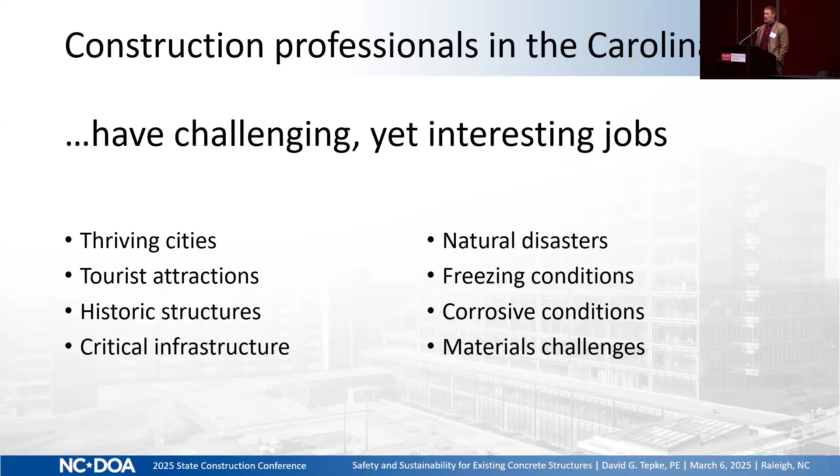And we also have material challenges. We have reactive aggregates that are used in making concrete right here in North Carolina, and there are certain things that need to be done to mitigate those certain types of distresses when those reactive aggregates are being used. So I guess as a person that looks at existing structures in the Carolinas, it's a very interesting job indeed.

So why are we interested in safety and sustainability of existing structures? Why is this coming up more now, seemingly more now than potentially ever? Well, when you look at the industry motivation for pretty much anything, usually change in the industry or need for new technologies is partially influenced by recent events, societal needs, and identified gaps. So while we can certainly ascribe the need to look into safety and sustainability of existing concrete structures because of these, this could pretty much be said for anything.

Obviously, we have initiatives and societal needs for extending our resources. Certain events that have led to additional safety regulations, etc. And also identified gaps in terms of the technologies we use.

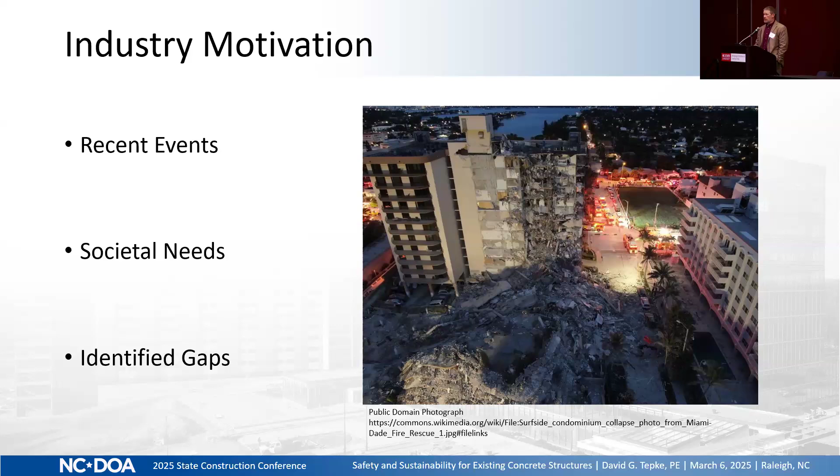So if you actually look at this, just kind of throwing some of the things together that are impacted by or impact those three primary drivers for change with respect to existing structures, certainly the environmental impact of the construction materials we use to make structures and how long they last, and also paradigm shifts. We'll talk as part of this presentation about how paradigm shifts are healthy and useful for the industry, but also we have to watch out for them because they can lead to maybe deceiving our experience.

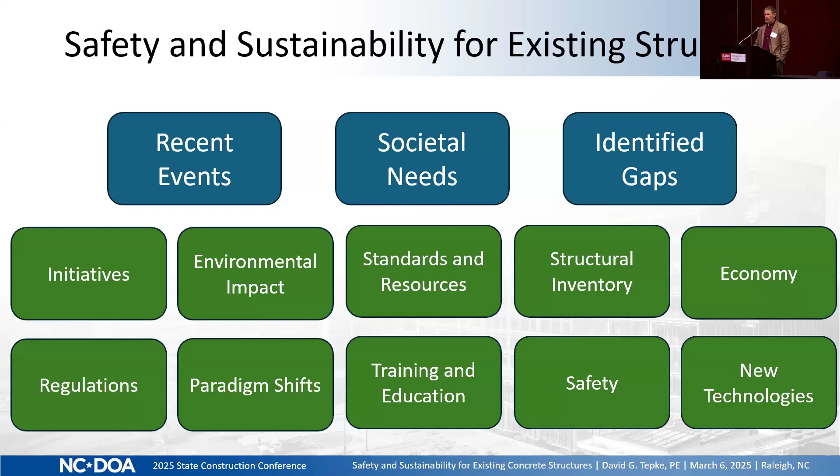And this leads into initiatives and regulations, and we'll talk a little bit about those with respect to safety and sustainability, new standards and resources, new trainings, and the impacts of economy and how new technologies can help us.

So what does structural safety mean? Anybody in the audience want to just yell out when you hear structural safety, what do you think? What is your impression when somebody says, 'Is this building safe?' What are they asking?

I heard, is it not going to fall down? Right, that's a very common definition, really. And we're going to talk here as we lead up how the code addresses safety, and also what an owner expects and maybe what an engineer thinks about when they're talking about safety. Well, that's a good definition. So what does the code say about safety and how does it qualify it?

The International Building Code, and by extension state codes that adopt it, in section 101.3 of the 2021 and 2024 International Building Code, says the purpose of this code is to establish the minimum requirements to provide a reasonable level of safety through structural strength and protection from hazards of dangerous conditions. So the code brings in this concept of reasonable safety.

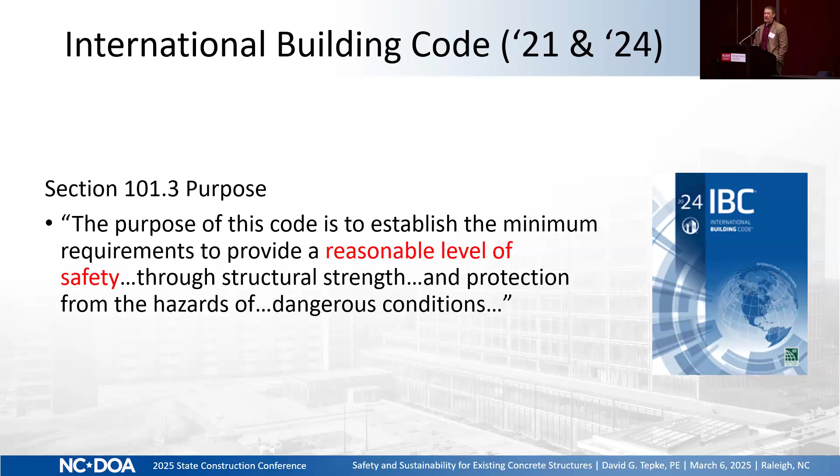And what is reasonable safety? Reasonable safety acknowledges the fact that absolute safety is something we frankly can't achieve, and we'll talk about why that is.

So in section 202 definitions, dangerous conditions are those described as has collapsed, has partially collapsed, has moved off of its foundation, or lacks the necessary support of the ground. That's a pretty good definition in terms of dangerous, or significant risk of collapse, detachment, or dislodgement of any portion, member, appurtenance, or ornamentation under permanent, routine, or frequent loads for the actual loads in effect and environmental loads when imminent.

And so this is the term significant risk of collapse. And how do we know what a significant risk is? And who determines what a significant risk is? And how do we quantify that?

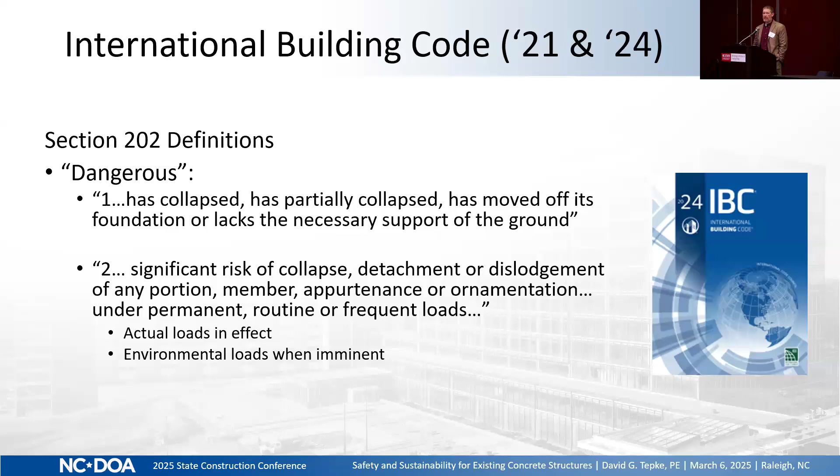The International Existing Building Code goes on to indicate that unsafe is essentially buildings or structures that meet the definition of dangerous or that are otherwise dangerous to human life or to the public welfare, et cetera. And so dangerous conditions are those that are unsafe.

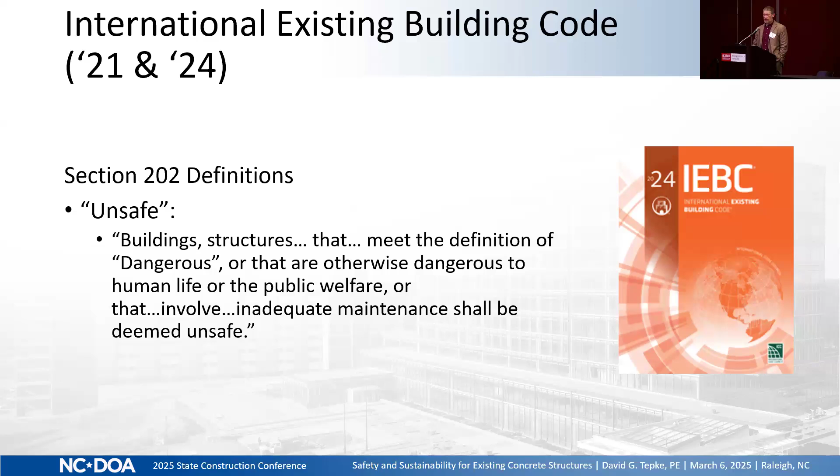The American Concrete Institute first published what's termed the Concrete Repair Code. It has a longer title than that, but it's called the Concrete Repair Code, and it was first published in 2013. It's been updated several times since, and it's been adopted into the North Carolina Existing Building Code as a permissible approach, meaning that you're allowed to use ACI 562 in the assessment and repair, structural repair of existing concrete structures.

But this document introduces a term called potentially dangerous, which is basically another qualifier that allows us to further determine what is potentially dangerous, or what leads to a condition that effectively does not meet the definition of reasonable safety.

It has been determined to have a demand to capacity ratio exceeding the limit of 1.5. That means that the demand or the load compared to the capacity is 1.5. So what that effectively means is that the factors of safety, if you're looking at the typical factors of safety on loads, are being removed. And at this point, this code indicates that that is a potentially dangerous structural condition.

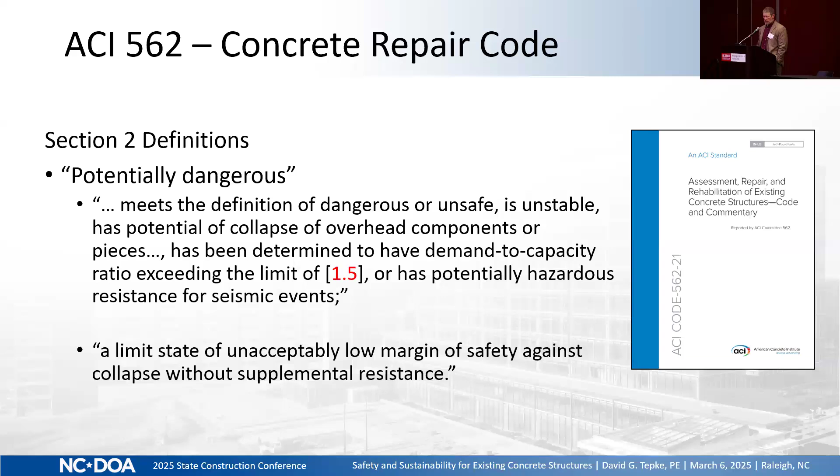There's some other definitions as well. So when we look at potentially dangerous structural conditions, this is a condition where we have structural deficiencies from corrosion, which mandated or required shoring to support elements that do not have enough capacity on their own to resist the loads.

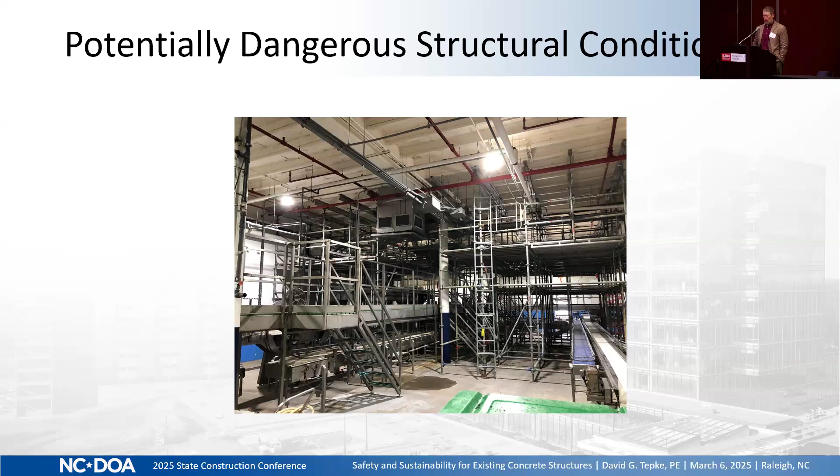Also, meeting the definition as written could be dangerous, potentially dangerous structural conditions from overhead spalling hazards. This is an example of what we see. Does anybody do work on the coast or in parking structures? The more likely scenario when it comes to corrosive environments is that of corrosion creating spalling in overhead areas that could potentially detach and fall large distances and hit somebody.

And when you actually look at the energy that can be generated by a 50-pound chunk of concrete falling 50 feet, or even a 10-pound chunk of concrete falling 50 feet, it's equivalent to the muzzle energy of some high-powered guns. So these falling hazards, these overhead spalling hazards, present a considerable condition of potentially dangerous.

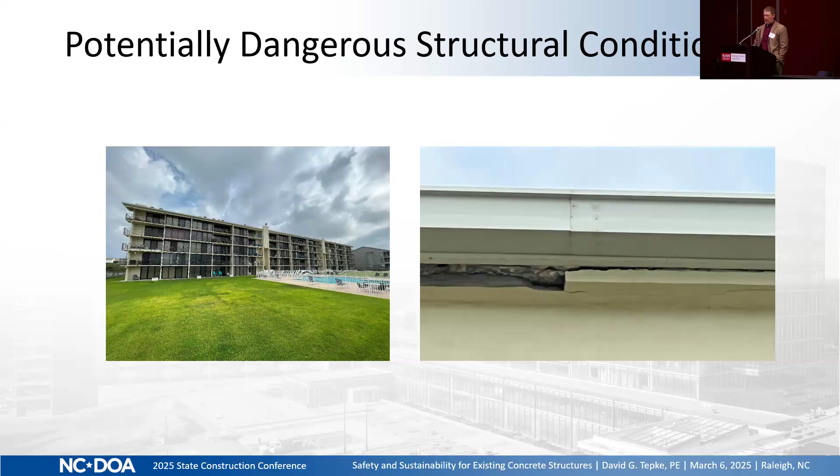But the concept of reasonable safety, and the first answer that came out, and we're going to loop back around to this, but when an owner says, 'Is my building safe?' What somebody who hasn't studied this or isn't sitting in rooms like this is really thinking they're asking is: is my building going to fall down, right?

What an engineer hears and what an engineer is trying to communicate back in terms of what they know about the safety, or what they can and can't know about the safety, and potentially what the likelihood or probability of a failure is, is something completely different.

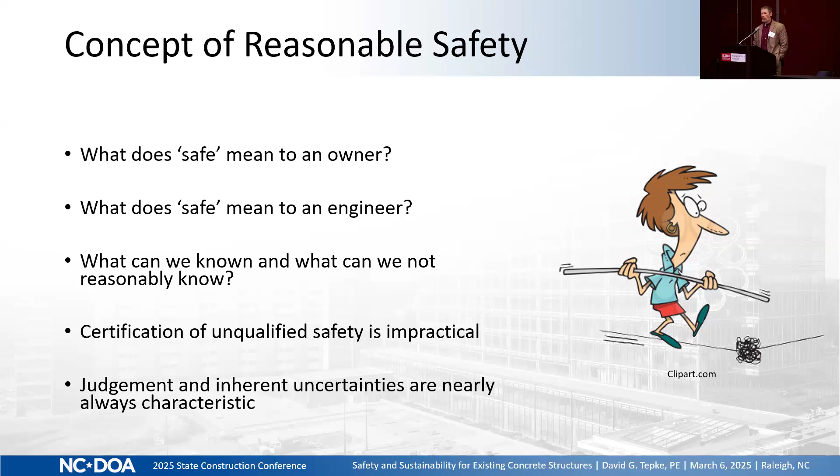It's the term and the idea of this reasonable safety, meaning that there is no absolute safety in anything we're doing, in any building that we're in, and we'll talk about why that is coming up. But certification of unqualified safety is impractical. And judgment and inherent uncertainties are nearly always characteristic in existing structures for a variety of reasons, and we'll talk about these in just a little bit.

But if you're familiar at all with how new structures are designed, basically what we're doing is trying to create a situation where the capacity of a structure has a very low probability of being overcome or being less than the amount of load.

When you look at this in terms of design practice, what you're actually trying to do, we have variability to all things, right? We have variability to the loads that we put on structures, and variability with respect to the resistance or capacity of structures, because we don't know precisely what the strength is, or precisely where everything is in the concrete. So what you're trying to do is separate the load from the resistance in a manner that the load is nearly always less than the resistance. Where these curves do overlap is the probability of failure.

From a safety perspective, people oftentimes say, well, we design to make things stand up. The way I look at it as an engineer is, we really design things to fail. When I say that, I don't mean you design them to fall down, but you design them with the understanding and intention of what happens when there is a problem. You want to consider the redundancies or what we call ductile failures, so that if there is an overload, there are situations that can be dealt with before there is some catastrophic problem.

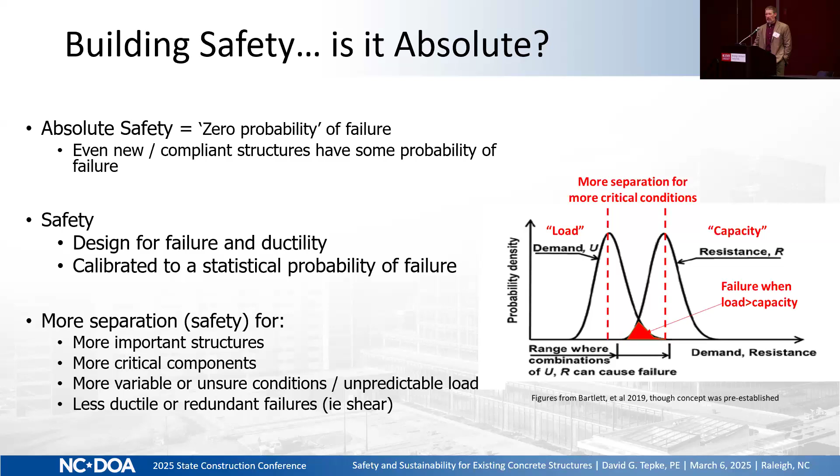More separation in these curves will occur for more important structures, for more critical components, or ones with less ductility or less redundancy. You need to extend this separation such that the probability of failure or exceedance is very low. So how does this work in codes?

Live load, for example, in a typical residential structure is 40 pounds per square foot. If you're designing in many residential structures, you assume that there's 40 pounds on every square foot as the live load, or at least as loaded for maximum load effects. But we don't actually expect 40 pounds per square foot to be on there all the time.

If you look at ASCE 7 in the appendix, you'll see that there's usually 6 PSF, maybe 12 PSF expected. However, if you look at a building over a 50-year lifespan, at some point somebody's going to get a hot tub where they shouldn't, or move and drag the washing machine, the dryer, the pool table, everything into the middle of the floor. Or maybe there's a party that creates a design event condition. So this idea is that these loads are developed for the probability of them occurring long term.

Similarly, for wind loads, we have Florida here as an example, but for different risk categories you anticipate different wind loads. For risk category 2, which is a normal building, you're looking for a 1 in 700 annual probability of exceedance. For risk category 4, such as a hospital or something needed for critical operation, you're looking at a 1 in 3,000 annual probability of exceedance. So this is how the code handles the idea of probability of exceedance.

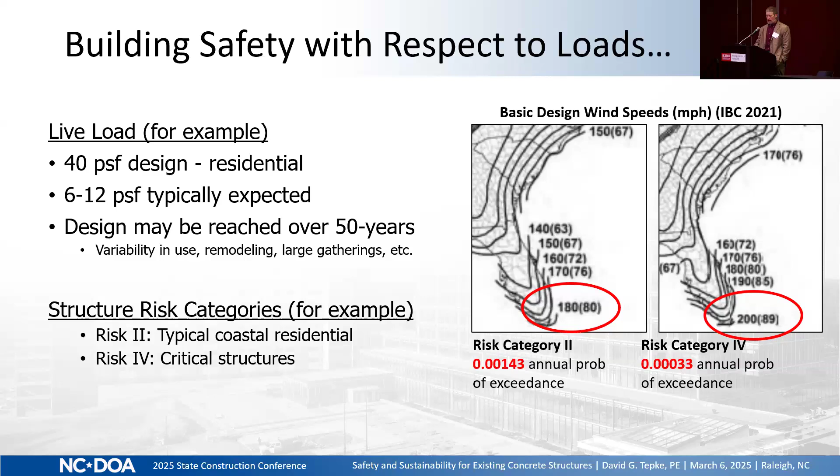So what is sustainability? We talked about safety. What does sustainability mean to you? Anybody want to yell out what's the first thing you think of when you hear sustainability?

Lasting, right? Something lasts long. What else? That's a good one. Anything else come to mind? Environmental responsibility, that sort of thing, right? These are all things that impact sustainability.

Let's take a brief look at what sustainability means. If you look at the Brundtland Commission definition, humanity has the ability to make development sustainable, to ensure that it meets the needs of the present without compromising the ability of future generations to meet their own needs. The EPA Report of the Environment Glossary says it's the continued protection of human health and the environment while enhancing economic prosperity and social well-being. Sometimes these concepts are referred to as a triple bottom line, with economy, society, and environment being the three major players defining sustainability.

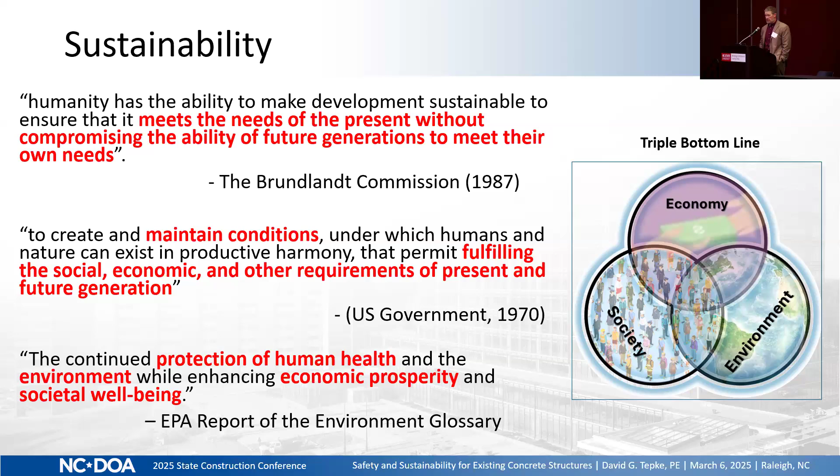For existing concrete structures, I put together this additional triple bottom line. When thinking about sustainability for existing structures, you have structural performance and safety on one hand, environmental responsibility, and structural and repair durability, or making things last longer. These three things significantly impact the sustainability of existing concrete structures.

Safety is part of sustainability for structures. Safety is the number one critical societal need for people today, leading into the future. So we've got to be thinking about cost, function, environment, durability, and service life extension, but safety is a key component. We might as well have renamed this presentation the sustainability of existing concrete structures, because it's redundant to say safety and sustainability in that respect, since safety is included.

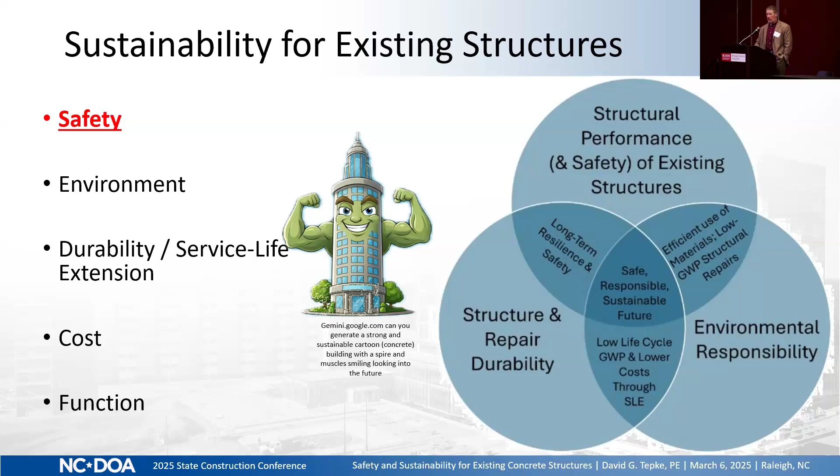So how is safety being handled in different areas? Really, all of this applies in terms of sustainability as well.

Jurisdictional regulations and ordinances—there are a number of them currently, and they keep popping up and continuing to be generated. Some examples are coastal condominium ordinances, such as the ones in Florida. There are parking garage ordinances, such as the ones in the Northeast. And there are facade ordinances in large cities where they require inspections on facades so they can get a reasonable level of assurance that large chunks of facade aren't going to fall off and hurt passersby. So these ordinances are cropping up.

The challenges with them are getting suitable language with respect to expectations and safety. I've read or seen a regulation that required a component or structure to be certified as safe, secure, and free of defects. I've never seen a building free of defects—I'm sure one has not been built.

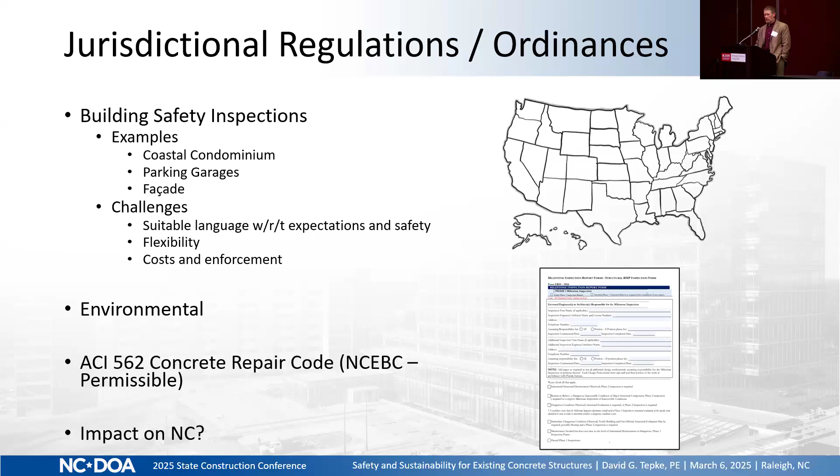So how do they often start? These condition assessments of existing structures start with a visual condition assessment, sometimes termed a phase one assessment—looking at the structure and the types of defects that could present themselves, possibly supplemented by some rudimentary non-destructive testing, but usually nothing major. Then, if something concerning is found, it could lead into a comprehensive condition assessment if required.

So there's a variety of resources for this—American Concrete Institute, and ASCE 11 was just updated for the first time in several years, which is a condition assessment guide. There are also documents such as ASTM E2270 for facade inspection. So there are a lot of guides and resources being developed.

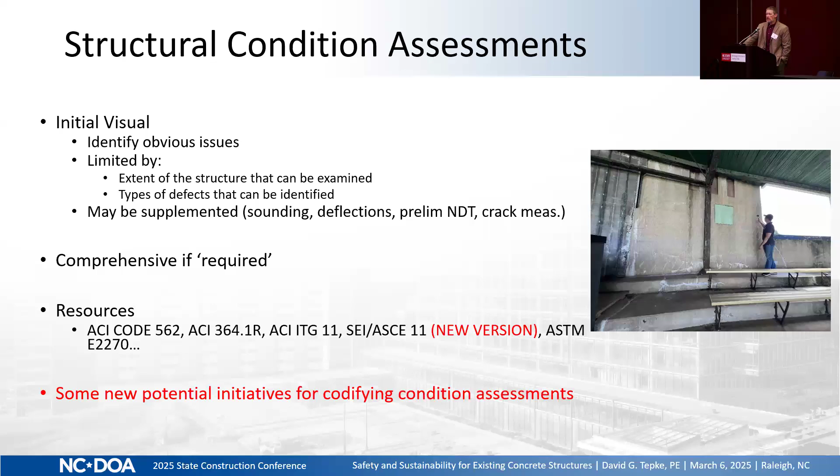As I understand it, there's some push to codify condition assessments. Now, if you're going to codify condition assessments, you need to allow for the flexibility that existing structures, with all their different types, require. I understand there may be initiatives in ICC and ASCE for codifying condition assessments, so these may become prevalent in the future.

Other challenges with existing structures involve a variety of maintenance practices, which may or may not be apparent when looking at a structure. Previous repairs, like these shown here, are not good repairs. This is how you don't repair concrete. If you look at the top left, it kind of looks like a New York City skyline in the repair geometry, which creates reentrant corners and all kinds of problems with cracking.

The one good thing is you can tell where the stirrups are in that beam, because I'm pretty sure those repairs kind of mimic where the stirrups are. In the upper right-hand corner, similar thing - it looks like some stirrups were repaired, maybe by a fraternity that was doing some work. It's hard to tell.

So anyway, we have historical maintenance practices that may be suspect. There could be changes in use, such as on the lower right-hand corner - that was a textile facility with hydrochloric acid exposure that sort of decimated the bottom of that column. That facility was converted, my understanding, into a parking structure. And so that certainly is a different exposure.

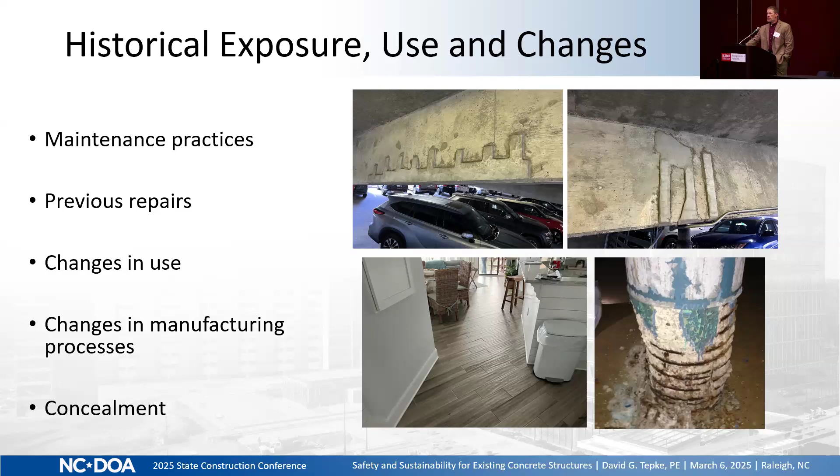And in concealment, when you're doing a condition assessment, there's often flooring, mechanical chases, all sorts of things that inhibit the ability to look at the structure. So these visual surveys may identify unsafe conditions, but they may not be viable for confirming quote-unquote 'reasonable safety.' There could be a lot of things that are unapparent.

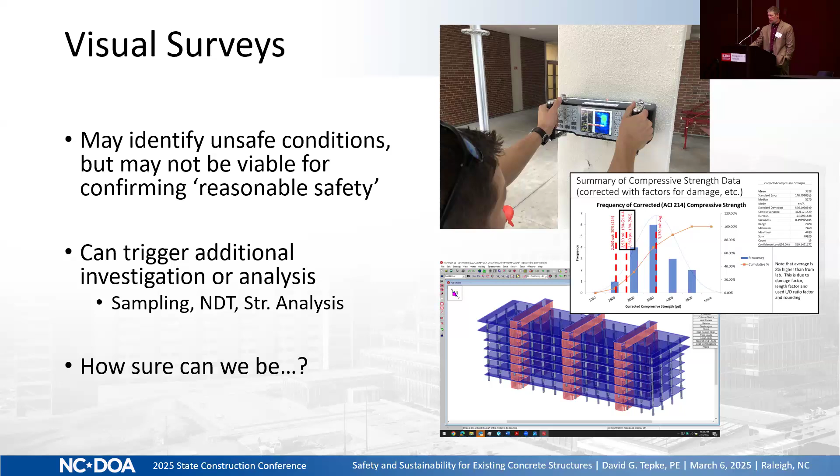I have a mentor that would say engineering is like an art and a science, right? And that's very true - you have to make it work, and then you can do the numbers and stuff. If engineering is like an art and a science, structural evaluation and repair of existing structures is kind of like abstract art and that kind of science that makes me feel really, really stupid sometimes. Because for as good as our equations are in new structures, when you're looking at an existing structure, there's a lot of other things going on.

Like look at this slab on the screen now - this is effectively a one-way slab going across the top of those beams. So what are we thinking about? We're thinking about the bond capacity of that reinforcing steel, how it's compromised by the reduction in the composite nature of the concrete, the fire performance of it, how much development length is tied back into the bars, etcetera. Now these slabs were replaced, but thinking about it, it's oftentimes subjective in nature. That makes it a very interesting part of the work, but it also makes it very focused on really trying to understand the principles.

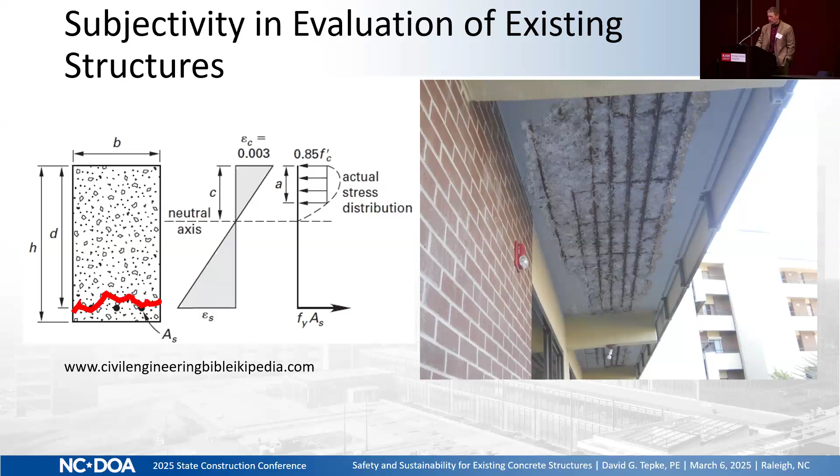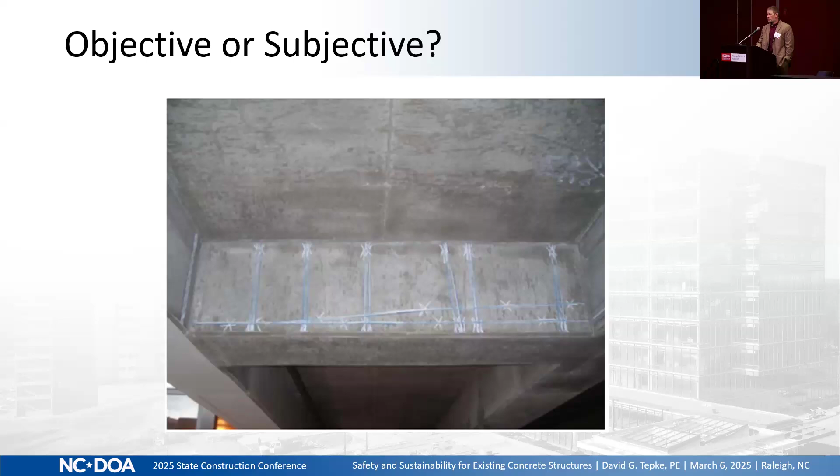Sometimes it's pretty straightforward. This is a girder, a transfer girder, and what you see - the blue marks - are just the locations of the stirrups. So if we make some assumptions about what the strength of the concrete is, we can pretty easily estimate the shear capacity here for identifying if these stirrups are or are not where they should be. So sometimes things are objective.

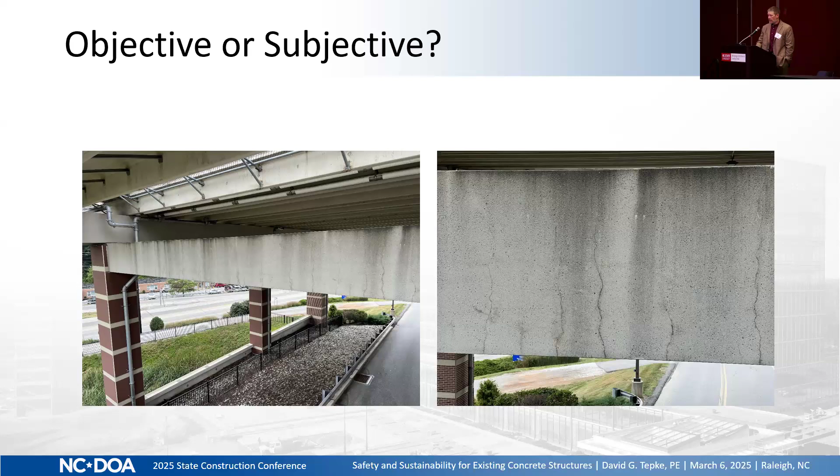Sometimes we see cracks, and concrete cracks - in case we didn't know, it cracks quite often. Sometimes it depends on how the cracks are changing, where the cracks are. These are cracks in the middle of a beam. Does that mean necessarily that it's unsafe? No - sometimes it's designed to crack. But if it's getting worse, if it's changing, if it's in concerning parts, the types of cracks can certainly impact how we feel.

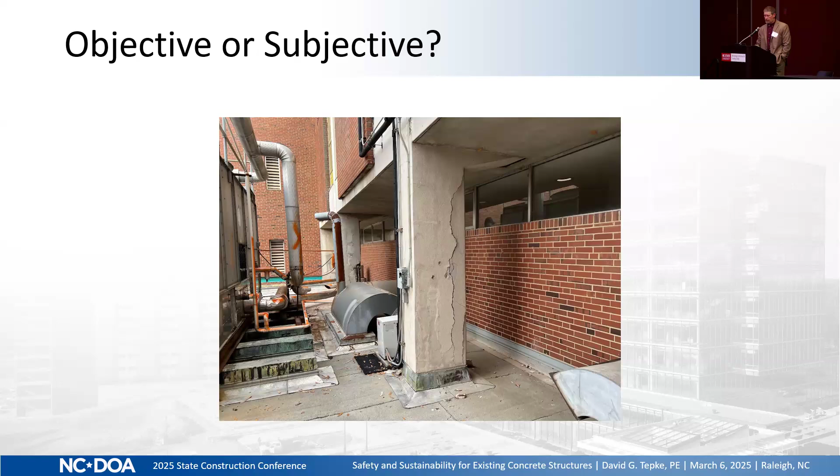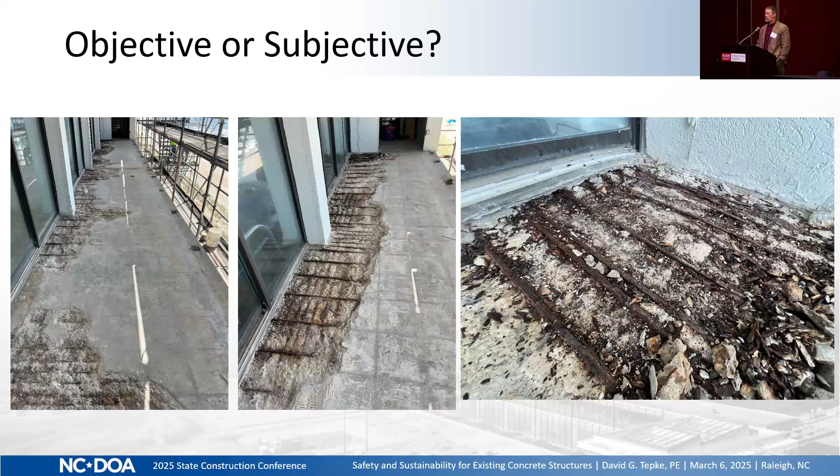This is an example of some distress and deterioration around columns, which can be quite concerning on a flat plate slab system, as you can imagine. So sometimes things are more apparent than others, but oftentimes there's a lot of subjectivity that comes into play and they're not straightforward.

So when we do visual condition assessments on a building and you're walking out and looking at it, these red, yellow, green diagrams are not meant as any sort of numerical or specific measurement. This is sort of a big picture of how you think about things or look at something. When you go out to a new structure built with current codes, inspected by current code philosophies and special inspections, you have a more comfort level that it's likely to be reasonably safe.

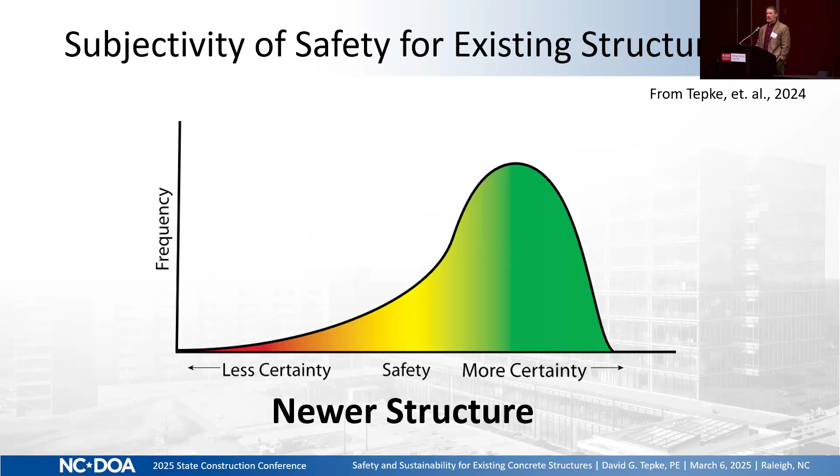There's always some possibility that the reinforcing steel isn't where it should be, or the concrete wasn't strong enough in a critical location. But again, for a new structure, conceptually, we think of it as having more certainty of reasonable safety, if that's the correct way to put it.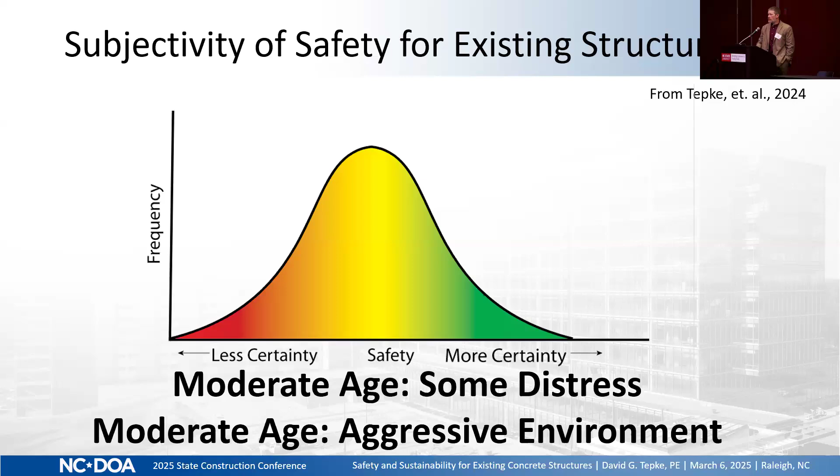When you look at a moderate age structure in an aggressive environment, maybe some distress, sometimes you're not really all that sure. And when you look at a building that's been there quite some time in an aggressive environment with a lot of damage, maybe you can be more sure, or I guess less certainty of reasonable safety, i.e. more certainty of potentially dangerous structural conditions.

The interesting thing there is we put a tail onto the right side, because sometimes there's things that just defy logic, that defy what we currently know in terms of engineering practice—redundancies, secondary effects, things you don't think about. So sometimes there's actually a level of safety there that you're not even able to take into account from the code perspective, but it could potentially be there.

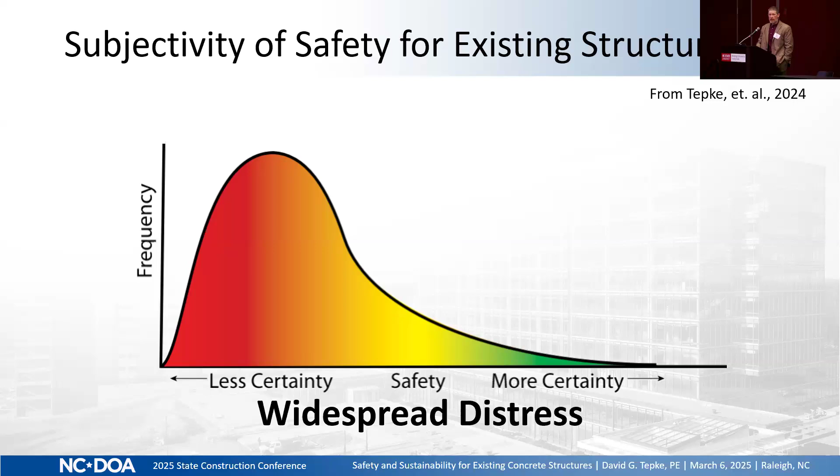This leads into what I was talking about before—what an owner's asking and what you're able to communicate as a professional. And the difference between saying something is safe and saying that I haven't seen anything that's unsafe. There's a whole different expectation of probability there. If you go out and say something is definitively safe, or even reasonably safe...

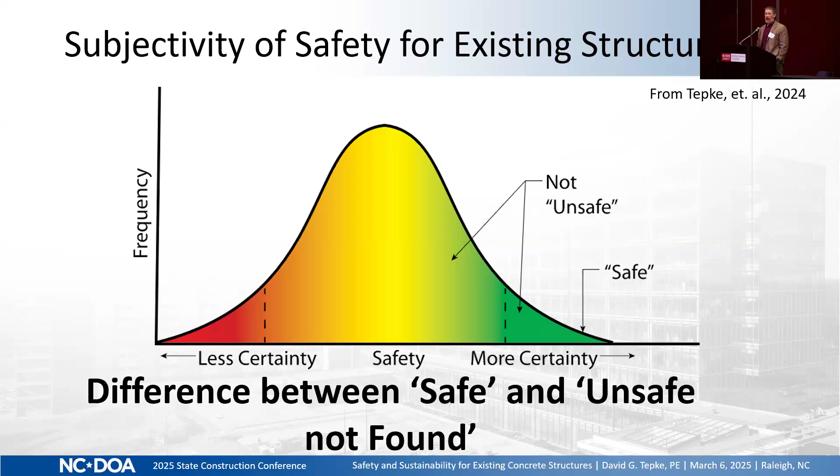And you have a lot of things covering what you can see, that's different than not identifying anything unsafe in terms of the things that maybe you're not seeing, that you can't know about, essentially.

When you actually look at this structure, the way we use phase 2 condition assessments is that they can help shift a curve one way or the other. Again, these are all conceptual, so don't get hung up on the numbers, but if we go out and look at a structure that has some moderate distress, do some testing, look at the reinforcing steel, test the concrete strength, we can get to a point where we now believe or really feel it's potentially dangerous or has a safety consideration.

There's also a possibility we can shift it the other way. You get good strength results, you test and the steel is where it should be, there's secondary effects you're able to take advantage of. But even if you're shifting that thing to the right, conceptually, there's still things you can't know no matter how much testing you do.

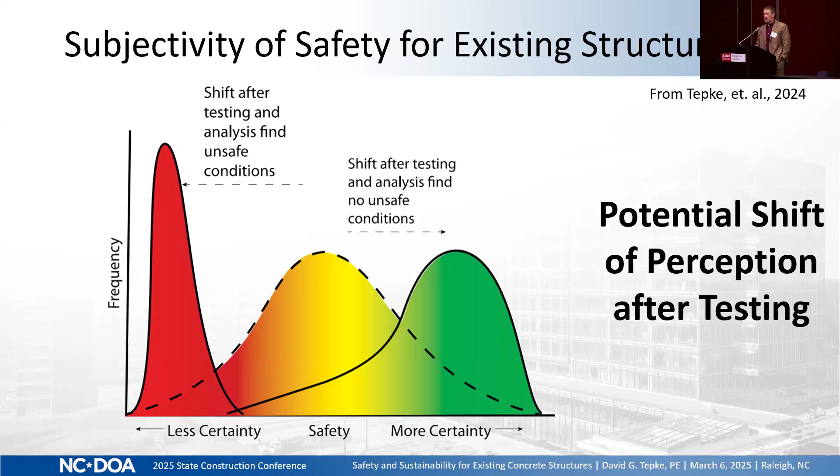So again, these are conceptual ideas just to help you understand the philosophy—at least a philosophy, I guess—on how we can look at existing structures.

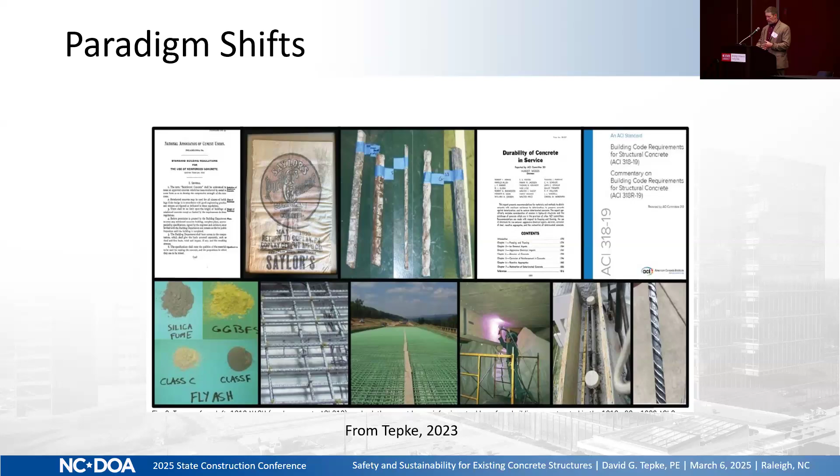I want to talk about how paradigm shifts impact our observations and what we think. Paradigm shifts are large changes in the industry, right? And these are very useful, very helpful things. They help us advance, help us move from the way we were doing things in the 20s, to the 40s, to the way we're doing things today.

Putting the puzzle together on historical aspects of what we know, how things were done in the past, can be very, very powerful. Understanding how an engineer in the 40s was designing something, when you're looking at a building built in the 40s, is very helpful—to understand what the expectations were at the time in the code, but also what we knew about different distress mechanisms, etc., in the industry.

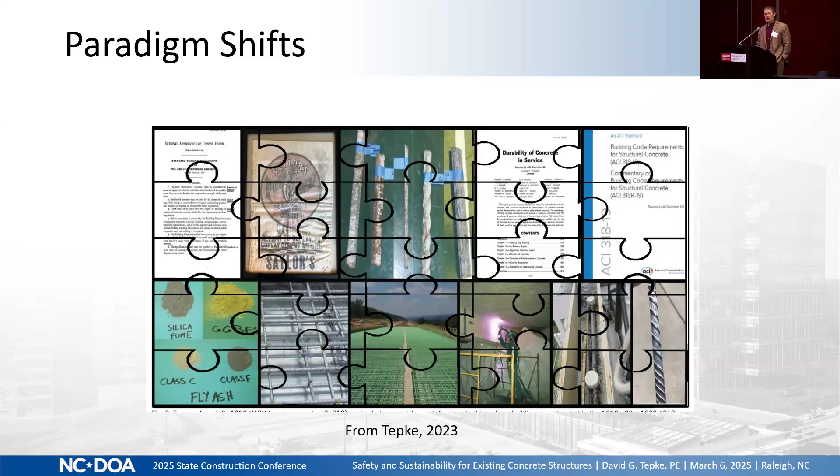Further, paradigm shifts help us really understand and help us not deceive ourselves. We have to be cognizant of paradigm shifts.

This is a fantastic figure from Ueli Angst's paper in 2018, showing in a country like the United States the construction boom—from the 1960s or so to the 80s to the 2000s, we were building a lot of buildings. So an engineer practicing or looking at buildings, say in the 1970s or 1980s, or even more contemporary than that...

...is looking at buildings that weren't all that old, okay? Compared to somebody today that's looking at a lot of our built infrastructure that's 60, 70 plus years old. What does that mean? It means that just because you haven't seen something or experienced something in your long tenured career doesn't mean that it can't occur, or doesn't occur, or there aren't additional issues.

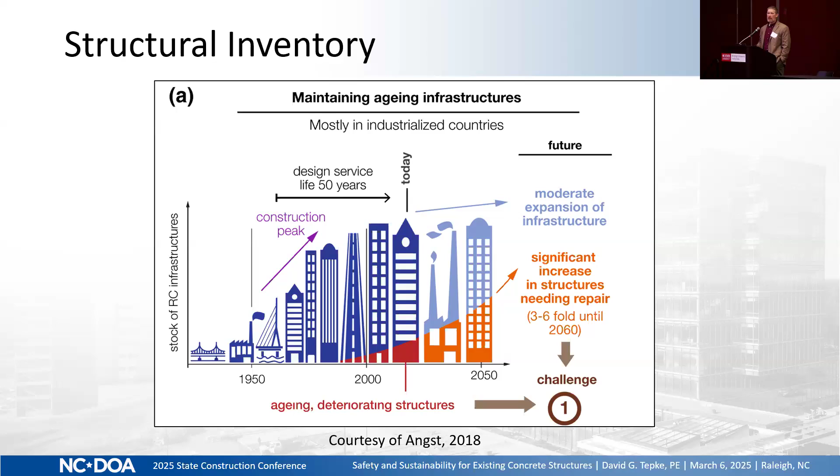We can't let our experience deceive us. We have to be cognizant of how paradigm shifts impact how we need to be looking at buildings, how we need to be looking at things.

A lot of our coastal areas were built in the 70s, 80s, and 90s. When I look at existing drawings from coastal areas, these structures are built in the 70s, 80s, and 90s, making them 30, 40, and 50 years old in aggressive environments, where sometimes we're repairing buildings that are only 25 years old. When you run service life models on some of these buildings, whether or not they're exactly right, it shows that corrosion in an unmaintained building can occur quite early in coastal structures.

So this idea of aging coastal infrastructure means we can't let our experiences deceive us, because we've not seen certain things with regards to their deterioration.

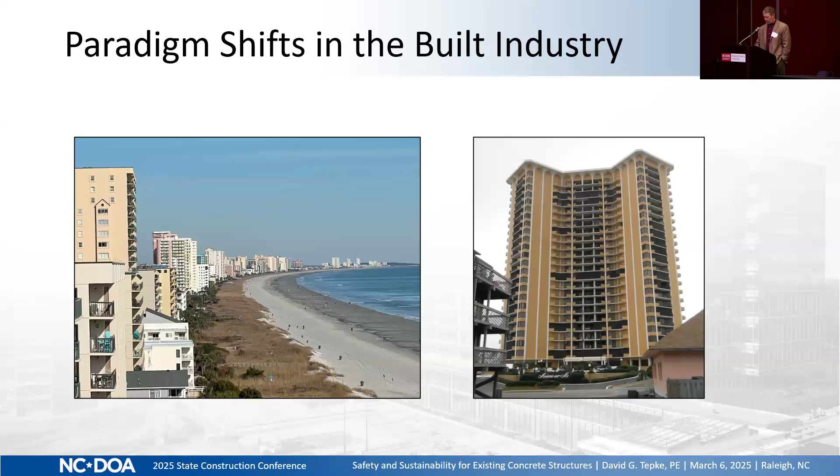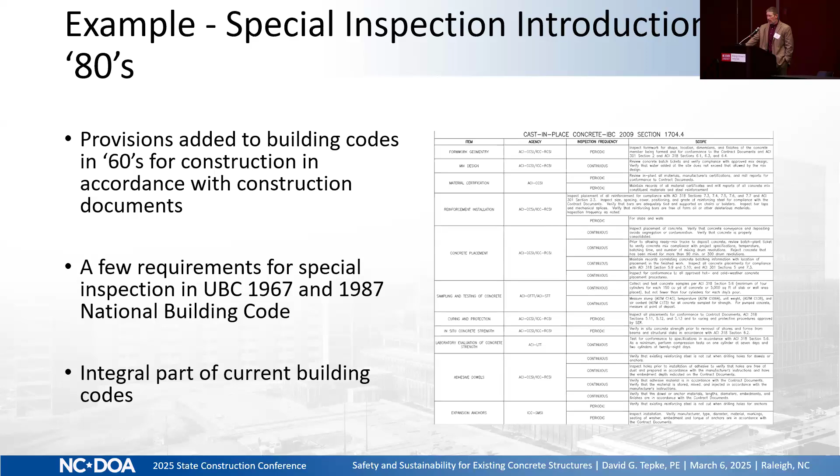Other examples: special inspections were introduced primarily in the 80s, but a little before as well. Today we have a lot of requirements for testing the concrete, testing the welds, making sure everything's where it should be. That wasn't the case when looking at buildings from a long time ago. So when you're looking at a building, your assurance that something was done, or your expectation, should be different than potentially what it is today.

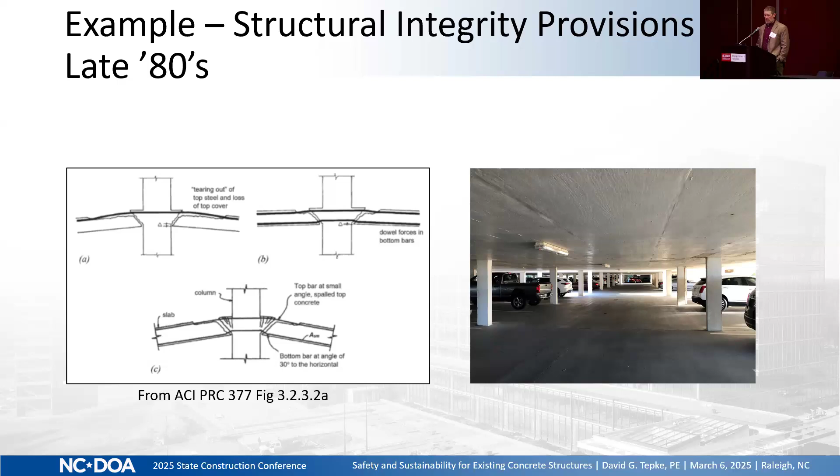Another example is structural integrity provisions in ACI 318 that started popping up in the late 80s. Everybody's probably heard of punching shear failure—it's a brittle failure, not a good one. In the late 80s, ACI 318 started requiring additional bottom steel going through the column area to create post-punch collapse protection—some structural integrity steel. So when you're looking at a structure from the 60s or 70s, even a designer who started in the 90s and has been doing this for 30 years needs to understand it hasn't always been that way.

I don't want to get too deep into durability discoveries, but my world is durability a lot. For instance, freezing and thawing was first identified in the late 30s and reported on in the early 40s. It wasn't until the 60s and 70s that it really made its way into the code. So structures built before the 1960s and 70s can have issues with lack of entrained air—well, they can today too, but it became more integrated into the code toward the 60s and 70s.

Corrosion we've known about for a long time, and it started to be addressed more from the 50s through the 80s. But we didn't start limiting the amount of chlorides with hard numbers in structures—basically cast-in salts from accelerators—until ACI did through 1983... before '83, there were no specific limits on how much chloride you could put in concrete. So when you're looking at buildings that predate that, these are important aspects.

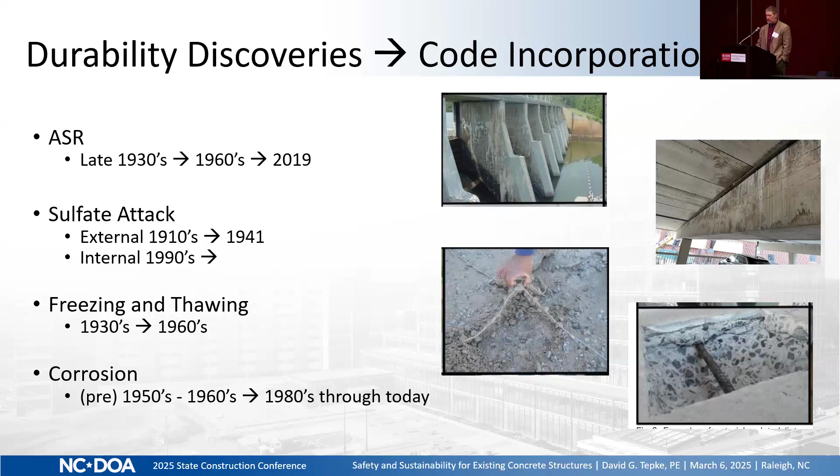I can share with you afterwards, if you're interested, a paper with some historical aspects on this. We also published something last year on the evolution of knowledge into codes, which is kind of interesting—there's a Concrete International article on this as well. It's interesting how long it takes an idea to get into regulation.

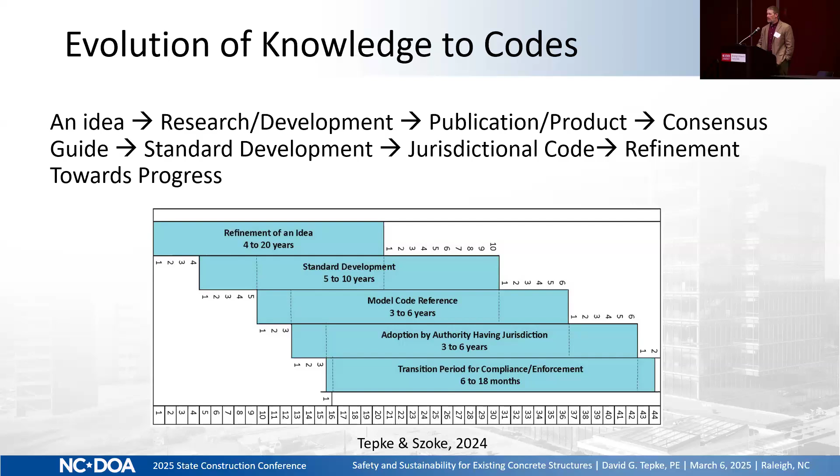In some cases it can be as low as 15 years, or 40 years or more, until an idea goes through consensus committees and then graduates into industry standard codes such as 318, then a model code such as the International Building Code has to adopt it, and then a local or state jurisdiction like North Carolina has to adopt it locally. So with freezing and thawing damage, how long does it take for provisions known in the late 30s and early 40s to get integrated into practice? It can take quite some time.

I want to switch over in the last couple of minutes and talk about repairs and service life extension, and how that relates to making things last longer—the comment that came from the middle to the back of the room about part of sustainability.

That's dead on, and something I think not a lot of people really take into consideration. I think sometimes when people hear and talk about sustainability, what they're often thinking is green, and they're talking about carbon demand. Very important things, but if you're not looking at the service life extension part of it, then you're not really taking everything into account.

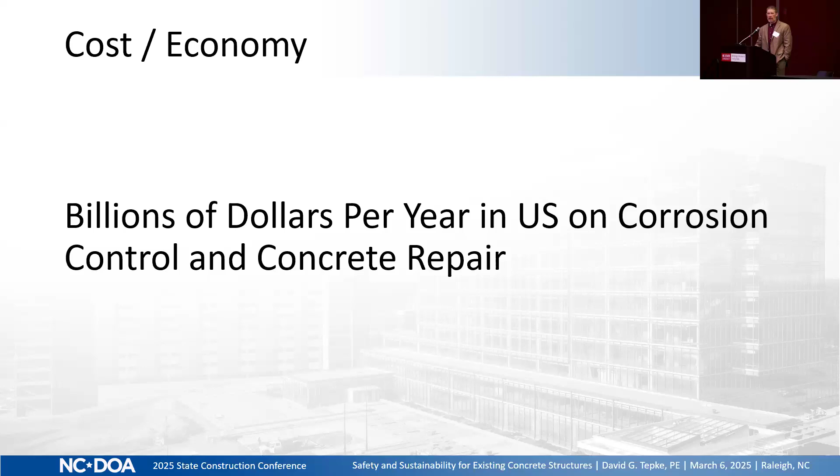Billions of dollars a year are spent in the U.S. on corrosion control and concrete repair. Numbers float all over the place over the last 15, 20 years. This is probably on the order of $75 to $100 billion a year. I'd say billions of dollars a year is a reasonable estimate for how much we're paying to repair concrete structures and control corrosion.

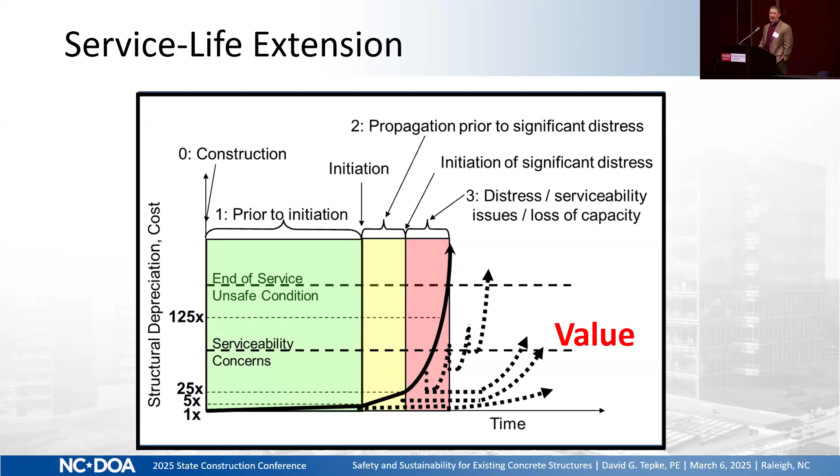The service life extension aspect we're talking about - this is a general service life extension curve. It takes a while, and this is for chloride-induced corrosion: salts in our parking structures soaking into the concrete to get to the steel, or salts from the ocean soaking in to get to the steel. It takes a while for them to get there. Corrosion starts, it festers for a little bit, and then once you start to get damage, you get a lot of damage, and it becomes sometimes cost prohibitive to repair. But when you do repair it, the idea is you want to extend that service life out, ideally before you help reduce the ingress of these things, to extend it out as much as possible.

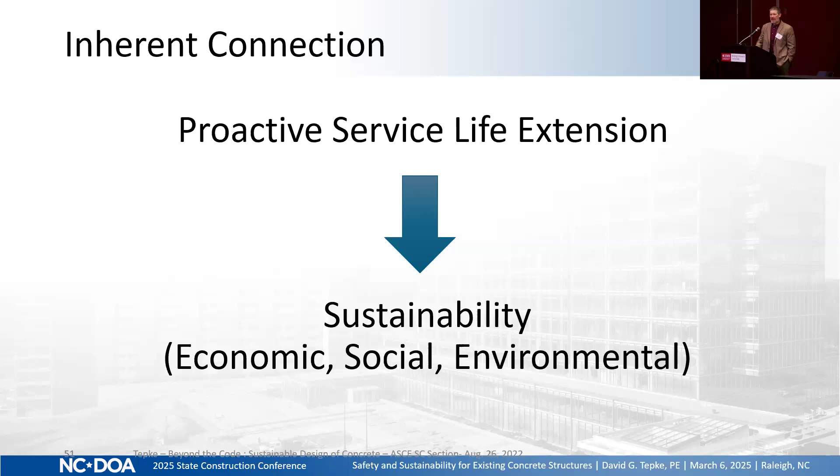So proactive service life extension, as was commented in the back, we could have ended 35 minutes ago after that comment about service life extension and sustainability. But anyway, we've got another 15 minutes here. Proactive service life extension is inherently a sustainable act.

ICRI, the International Concrete Repair Institute, came out in 2014 with a white paper, and one of the quotes that was interesting - not surprising, really - the most sustainable management approach for buildings is to diligently perform preventative maintenance to avoid or at least minimize the need for repairs. That's pretty intuitive, but it's an important statement, one we should definitely be thinking about. Committee 160 is currently updating this document, so it should be published here quite soon.

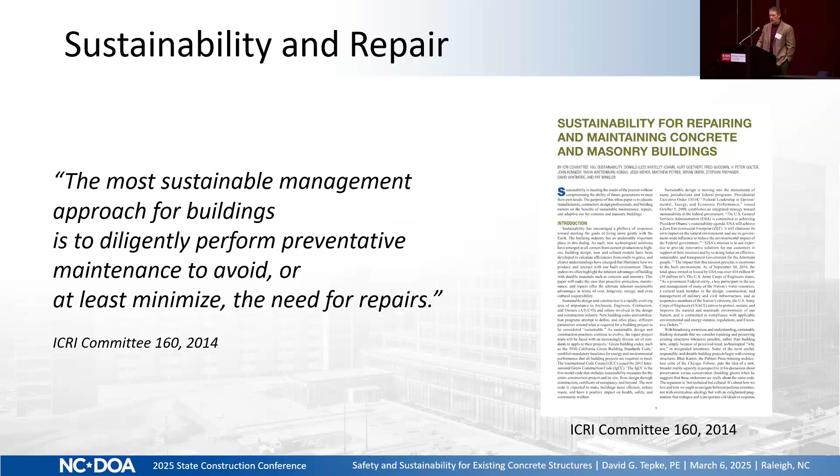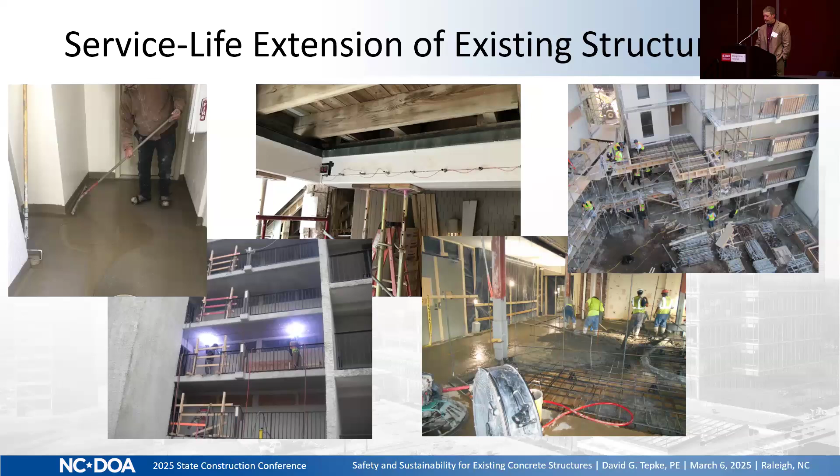Repair versus replace comes up, right? When should we repair compared to replace? We've already talked about deliberate service life extension being a sustainable act. There are potential situations where that's not true if things have gotten too far down the road from a deterioration mechanism, and conditions might be prohibitive even from an environmental, cost, and service life extension approach if a building is in too bad a shape. But considerations include the function of the structure, making sure it's functional to the owner - what is the function for the owner, the service life expectation, what can be done to extend the service life, the amount of damage and the cost, and also the environmental implications.

The quantification is a developing field. When we talk about EPDs and carbon emissions and carbon demand for new materials, personally I think there's certainly room to advance in becoming better at estimating those things with more precision. With respect to existing structures, I think there's even more opportunity for advancement and development in understanding how different service life extension methods can help from a service life and life cycle cost analysis perspective.

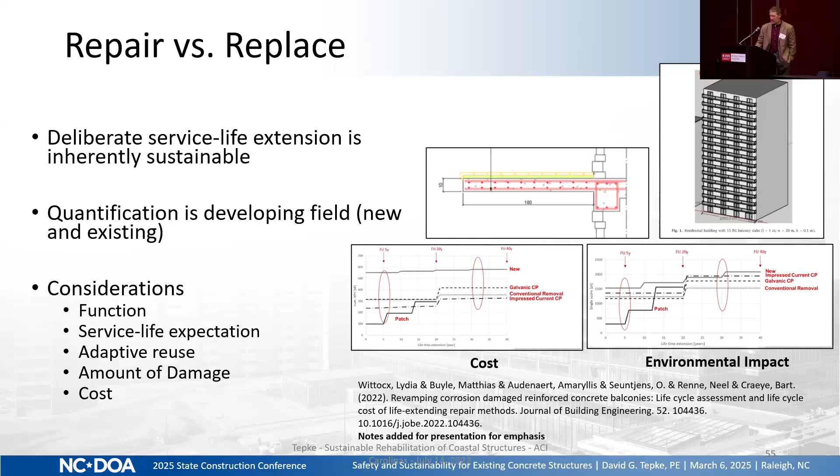These graphs I've shown here are from some research by Wittocx, 2022 - a very good research paper. They showed how different approaches for repair compare in cost, how much additional service life, and also the carbon demand. This is the type of thing that's going to be developing, I think, in the future. When we repair, or for new structures even in coastal environments, looking at the durability of new construction, we know we have technologies in place now - and don't worry about these specific numbers - this is from a service life model called Life 365.

These things need to be looked at probabilistically. Individual numbers don't mean as much to me as the trends. For code-compliant concrete from today or from 20-30 years ago, if you could expect X amount of time until corrosion starts on the South Carolina coast, there are ways to 2X, 3X, 4X, even more that time using stainless steel, other technologies, corrosion inhibitors, different cementitious materials, and these things.

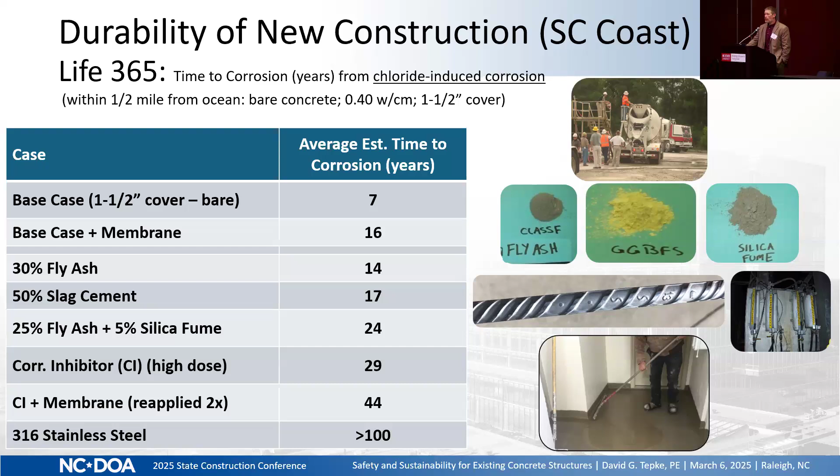This is what we should be thinking about, not only when replacing components within a building for service life extension, but also in designing new buildings. Now, in the last couple minutes, I want to talk about how I think the industry is changing, and it always had and it always will. The way I look at it is that as the roots of knowledge grow deeper, our need to understand information spreads out.

Look at scientists in the 1600s, we always go back to Newton. He was doing experiments on optics, went away into a barn house and developed calculus, doing all kinds of different things, and he started developing these roots. When you get to the 1700s, you start to see civil engineers. By the late 1700s, 1800s, 1900s, we start to see mechanical, plumbing, and structural engineers, and now we have codes.

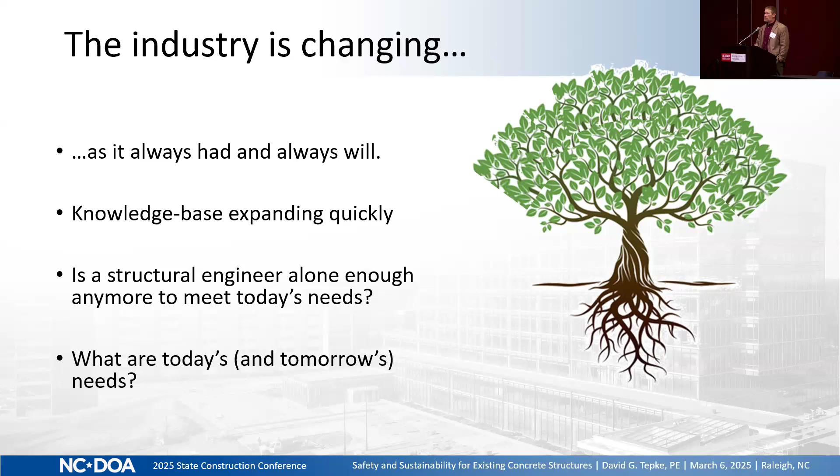The concrete code, ACI 318, is about 700 pages long. At what point do those branches, because the roots of knowledge are getting so deep, have to spread out? Is a structural engineer anymore enough to solve all the intricate problems? And I'm not just saying for a structural engineer, I'm saying everything. As these branches get larger, we start to think and talk about the additional need for information and expertise to facilitate that.

This is just over the past 10 years, industry consensus documents. ACI is the American Concrete Institute. ICRI is the International Concrete Repair Institute. And AMPP is the Association for Materials Protection and Performance. It's a newer organization, a combination of the old NACE, National Association of Corrosion Engineers, and SSPC, the Society for Protective Coatings, that merged into AMPP.

What I'm showing here is that over the past 10 years, I counted the documents that came out from those three—I'd call these the big three organizations developing industry guidelines. There have been over 100, about 150 of these documents that have come out to help us be better at our job. That's fantastic, right?

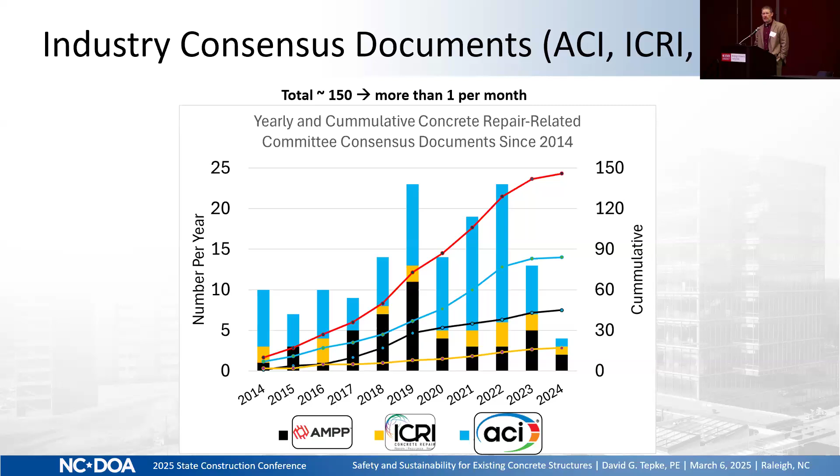But it's also daunting. You're getting, on average, one new document per month coming out to help you do your job. You've got to be able to absorb all that and then apply it. That's exciting that we're getting this much information, but it also lends to the fact that we need avenues and professionals who specialize in doing these things.

There's new and developing ACI standard codes. I talked about ACI 562, adopted in 2022 in the North Carolina existing building code as a permissible approach, meaning it's okay to use it—you don't have to, but it allows you to. ACI 440.11 covers glass fiber reinforced polymer reinforcing bars, a code to use those bars for concrete in certain seismic conditions, and that was adopted in the 2024 International Building Code.

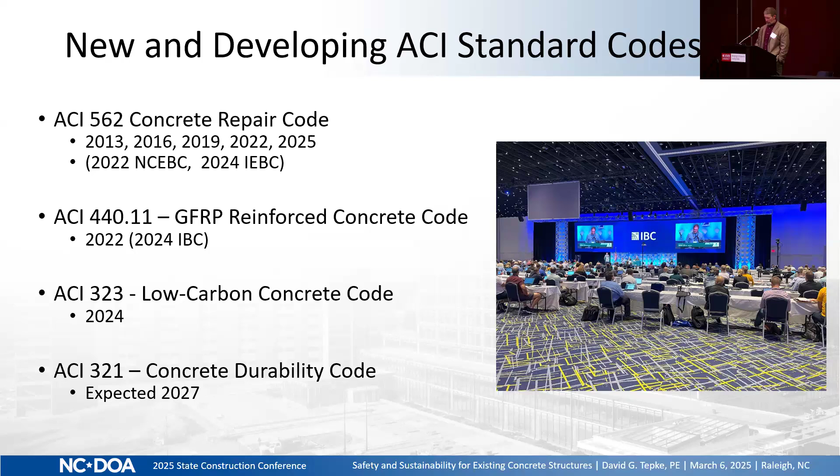There's a new low carbon concrete code published late last year, and expected in 2027, a concrete durability code being developed. This durability code is meant to supplement ACI 318 when you want more durability or where you're in a particularly aggressive condition—another code that's coming out to potentially help. There's also a variety of environmental initiatives: ACI, ICRI, ISO standards, various life cycle analysis programs, and others.

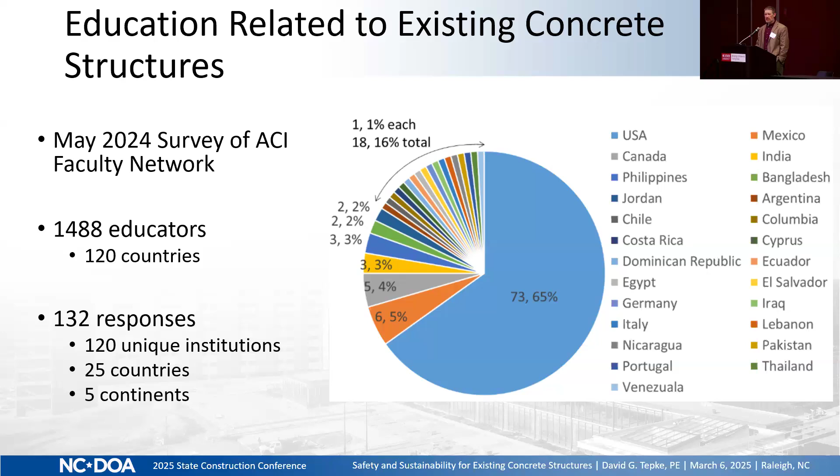I'd like to briefly talk about a survey I sent out to the American Concrete Institute Faculty Network last year, around this time or a little after, in which they have 1,488 educators in their network. The survey went out to everybody, basically asking them what kind of courses they have. An overwhelming majority of the respondents were from the United States.

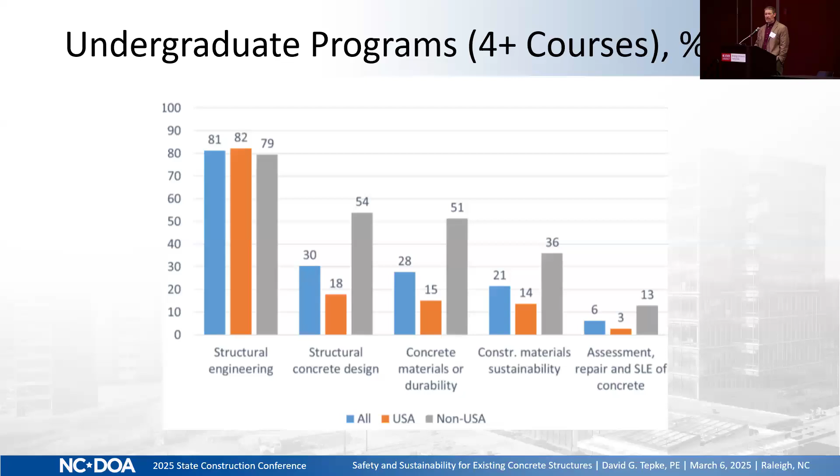But look at how many have curriculum with assessment, or self-reported assessment and repair, or sustainability, or durability, and these sorts of things, and it's much lower. That's not surprising, right? But it does highlight the fact that these are situations we'll need to address as a society.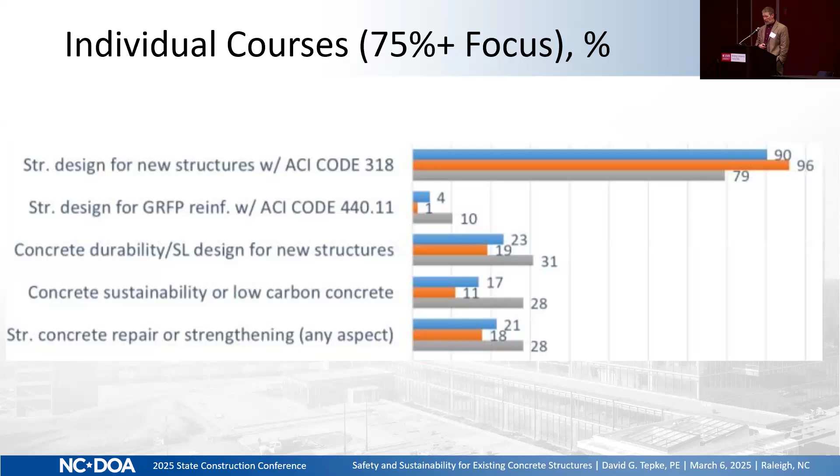The next two slides are just a blow up, looking at individual courses with 75% plus focus. Again, a lot teach ACI 318 structural design, but comparatively less teach repair, sustainability, and these sorts of things, which are very important for our society moving forward. So do I think there's opportunity in our educational systems to help people soak up this knowledge base?

We are in a career that demands experience. Everybody who's looked at existing structures knows you look at them a lot differently now than the first one you looked at, right? You probably design the repairs for them a lot differently than you first did. So experience will never go away. It'll always be king.

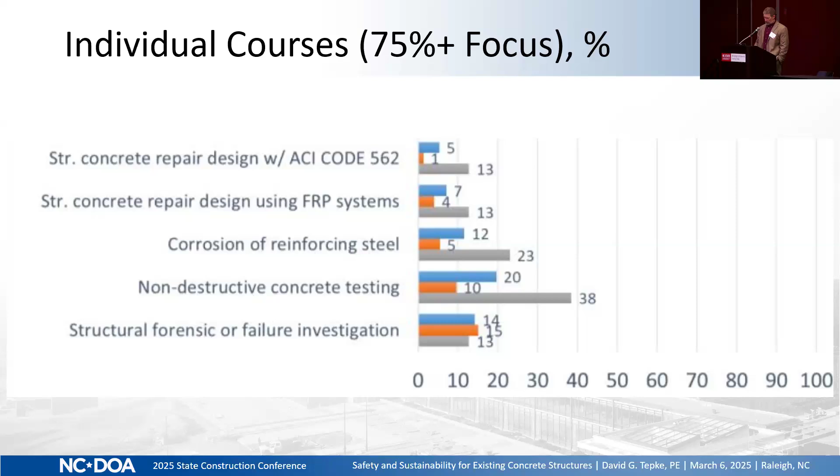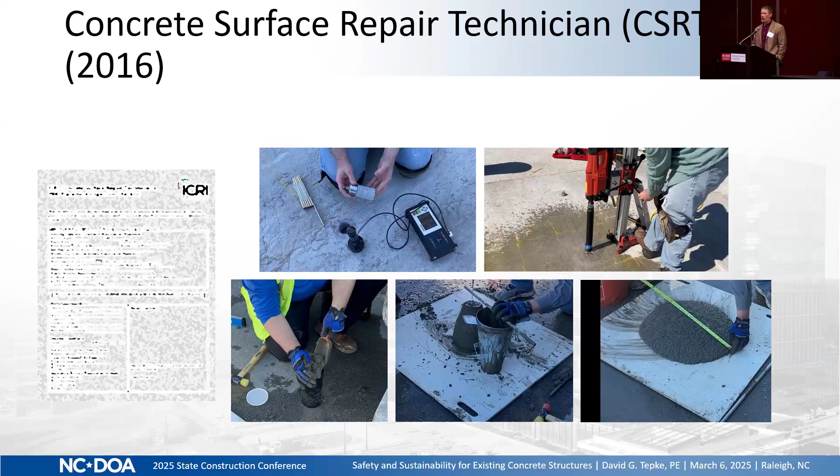But there is opportunity for these fundamentals to be developed at the university level. There are also initiatives to train the people actually doing the work. The International Concrete Repair Institute has a concrete surface repair technician program, which helps inspectors and even foremen and superintendents know the important aspects of concrete repair and how to test for certain things. There's also a developing program, the ICRI Repair Applicator Training Program, meant to train the actual applicators, the people installing the repairs.

There were a couple of pilots done. One was done here in Raleigh last year, where I can't remember exactly how many people went through, but a number of contractors sent their applicators through. This is now going live, giving contractors the opportunity to have their people trained so the repairs they install last longer and are more sustainable, to borrow a phrase offered before.

I want to end on some recent and evolving technologies for building evaluation. There are a lot more tools coming out, a lot more toys today than when I started, and it's very interesting. The interfaces with these toys are very helpful, the way we can use AI and these modules in some of this equipment to help interpret for us.

LiDAR and photogrammetry are being used. Structural health monitoring, understanding strains and movements, as well as performance for materials related to stress. Drones, industrial rope access—these are all things people are using, integrating into their structural evaluations.

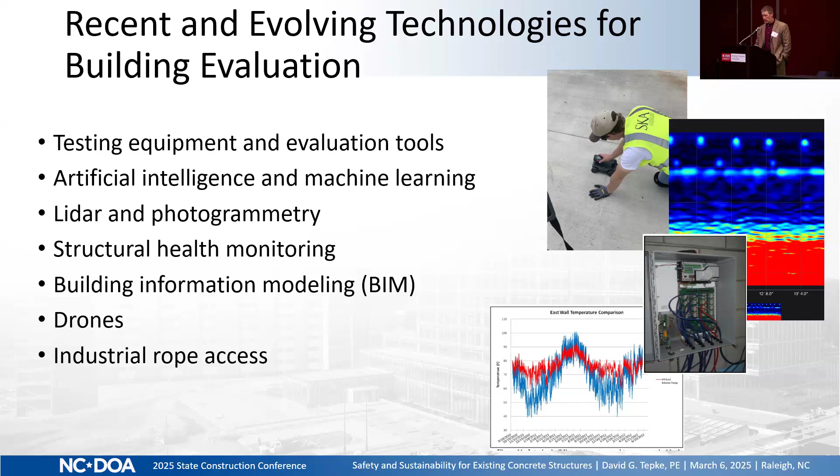So looking to the future, again, we're going to continue to age, but the buildings, the infrastructure and our inventory are going to continue to age as well, and we need to be thinking about that. There's a ton of additional resources out there, and taking advantage of them is going to be very important. We need to emphasize, and I know we do, but we need to emphasize more durability, and there are things coming down the path that can be used for both service life extension of existing structures and new structures.

I think advancement of environmental impact predictions is going to be necessary, so we're getting truer ideas of what the carbon demand is on some of these materials, and how that's integrated with service life. If you're using X% more carbon demand to build something or extend the life, how does that compare to how much longer the structure is going to last? And how can we balance that out to make it last longer?

There likely will be more regulations and codes. There are a lot of codes being developed. Integration, and also the need for education, I think, is very important.